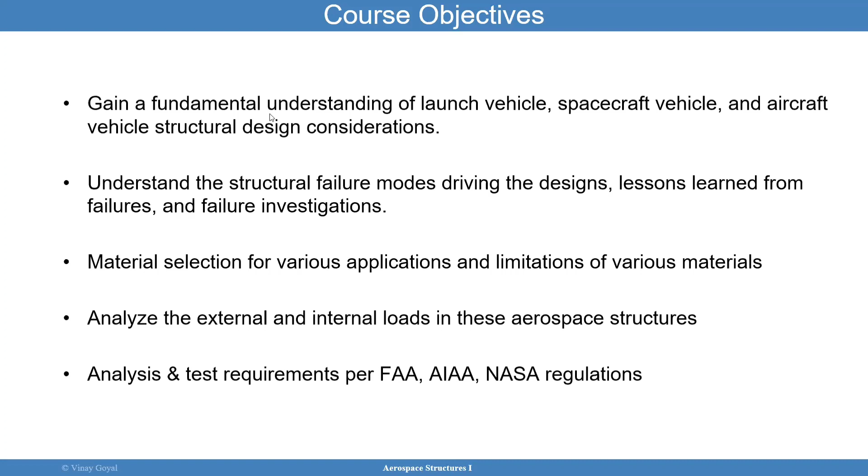The next thing that we're going to talk about is the course materials. The text and references for this course will all be provided to you. I'll provide you all the course materials in PowerPoint in the form of briefing packages, paper publications, NASA and FAA publications. The primary textbook of this course is the one I wrote with my brother. It's called Analysis of Aerospace Structures, and it's the first edition.

This edition will cover primarily aircraft design, but it can also be extended to other applications. The course will cover topics that are not included in this book, such as launch vehicles, spacecraft vehicles, and potential lessons learned from failure. We will cover some FAA requirements in this book, but not all of them. For example, AIAA and NASA requirements may not be covered in this book.

What we're going to discuss now is the additional recommended books. Spacecraft Structures and Mechanisms is a book I recommend if you're going to work in the spacecraft world. I'll be covering topics from that book as well. I also recommend getting hold of other books if you're going to work on aircraft designs. It's called Aircraft Structures for Engineering Students. That's another book I recommend if you can get it from the library or get a used copy. But I will primarily be using my book, so this is not a requirement. If you want to see how others approach a subject, then it's worth it.

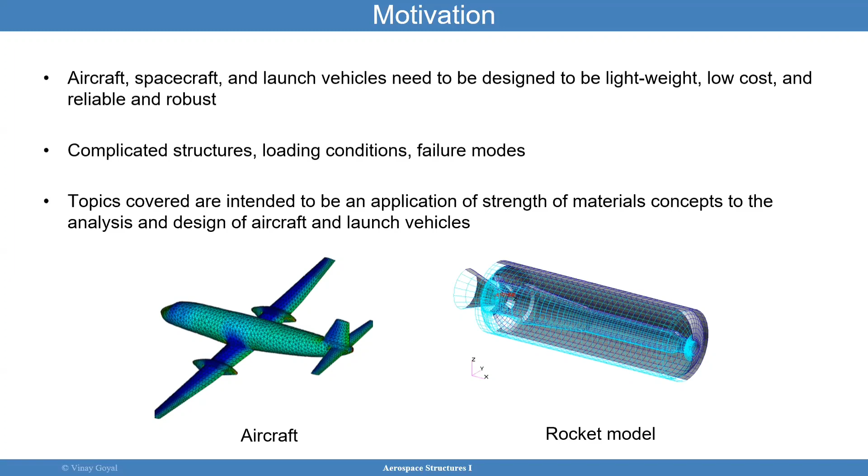Boeing 787: in this example, there was wing damage that grounded the Boeing new composite 787 Dreamliner. It occurred when the stresses on the wings were well below the loads the wings could take. Damage occurred on either side of the wing body joint, here in this region.

In this area, the structural flaw in the Boeing design was found during the ground test that bent the wing upwards. One of the testing procedures is to apply loading to these wings, bending them upwards, sometimes several feet up. The purpose of that test is to verify the design integrity of that wing.

The stresses at the end of the long rods that stiffen the upper wing skin panels caused the composites to delaminate. Damage occurred at the end of each of the 17 long stiffening rods, which we typically call stringers, and on each wing's upper skin there was some amount of damage.

The testing was supposed to go to ultimate load levels. I'll discuss ultimate load levels later, but the bottom line is that failure occurred very close to the maximum loads expected in service. For that reason, the design had to be revisited.

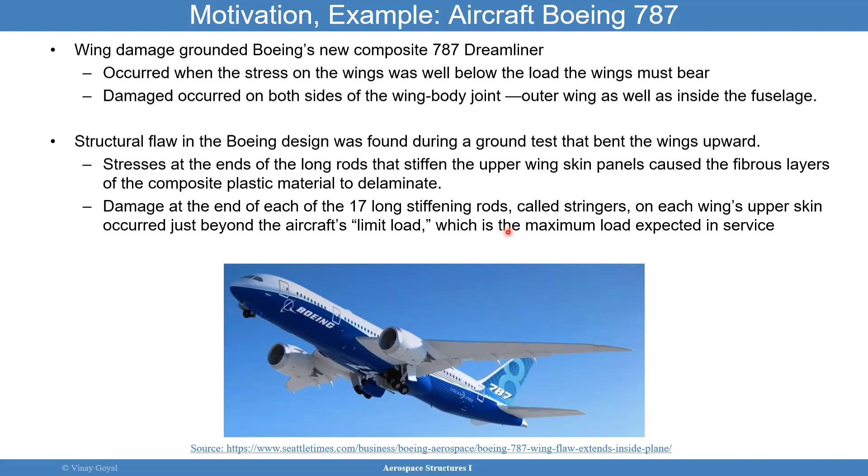Another example of the motivation behind why we're studying this - it's not that I'm going to solve these problems in this course, but to show you that structural failures do occur, and that therefore motivates the need for learning some of this material.

In 2015, the Falcon 9 V1.1 design carrying the Dragon CRS-7 mission failed towards the end of stage 1 burn. A strut holding an internal helium pressurization tank broke during second stage initialization at T plus 139 seconds at 45 kilometers altitude. The resulting overpressure caused the second stage to blow apart.

This scenario is described in the source here at the bottom. You can go to that link and study this more.

But there's also a second anomaly that occurred. It was a giant fireball on the launch pad when the vehicle was on the pad preparing for some testing. The helium being loaded into the rocket caused a failure.

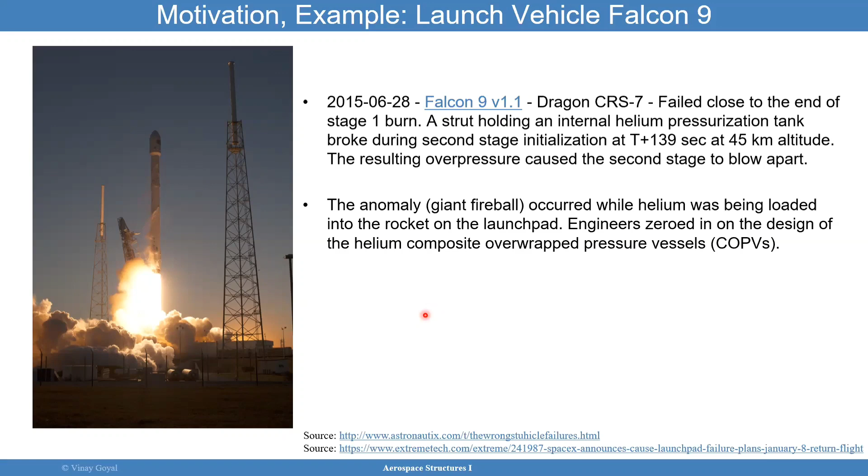Moving forward, we have the spacecraft, the James Webb Telescope, which is an amazing piece of science. This is going to be unprecedented, able to see farther than we could with the Hubble telescope. You can see here the backbone of the structure is highly complex, and it almost needs to be motionless so that the mirrors attached to this backbone can see far into deep space. This structure is designed to provide unprecedented thermal stability performance, meaning when subjecting the James Webb telescope to temperatures potentially colder than minus 400 degrees F in space, we need to make sure the backbone of the structure stays steady to within 32 nanometers, smaller than a human hair.

This backplane is actually part of what we call the telescope structure, and it includes the secondary mirror support structure and the deployable tower structure. All of this has to work well together, and it's no surprise the James Webb Telescope has experienced delays, because this is a very ambitious and very complex program.

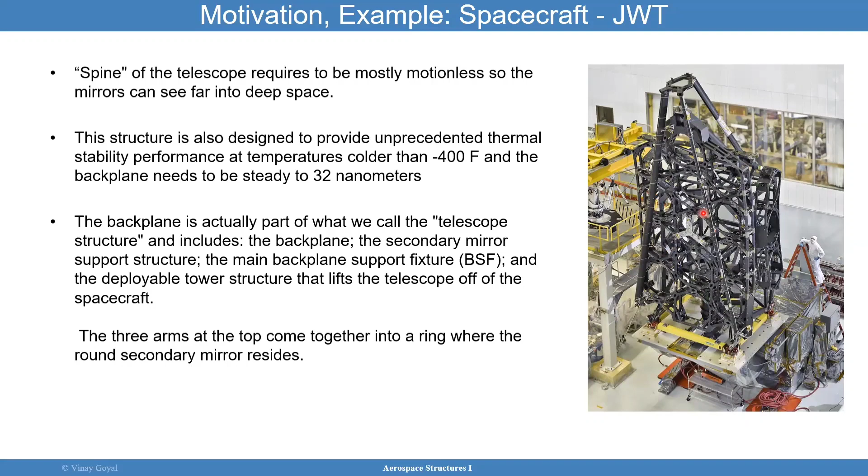The course outline is as follows. We're going to go through the overall design process for aircraft, spacecraft, and launch vehicles, the stress-strain constitutive law, and finite elements, covering fundamental aspects important to this class. Then structural failure modes, and an overview of aircraft, spacecraft, and launch vehicle components and their design drivers, connecting these together.

We'll then move on to material selection and testing for aerospace structures, and then cover aerospace structures, load, sizing, and design, covering aircraft, spacecraft, and so forth.

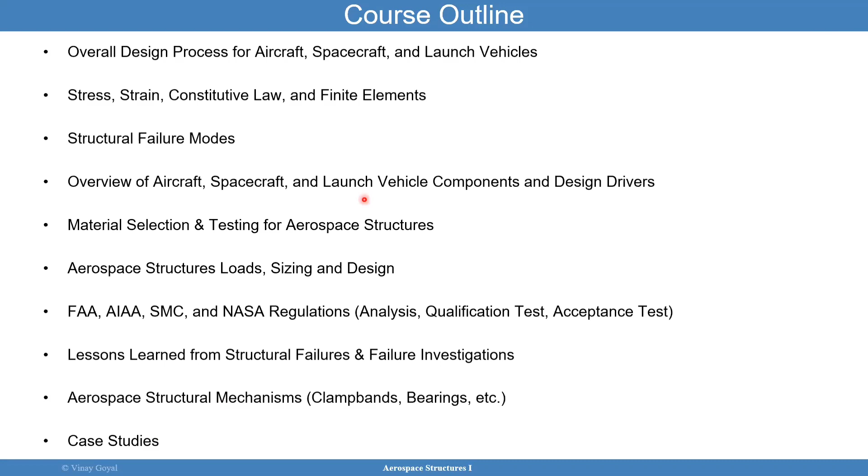Then we'll move to FAA, AIAA, and NASA regulations that contain analysis, qualification, and acceptance test requirements. From there, we'll move to lessons learned from structural failures and failure investigations, then aerospace structural mechanisms such as clamp bands, bearings, and things like that, and some case studies from industry.

So today we'll be covering aerospace structures one, aerospace systems engineering, and I pulled from a variety of resources here, as you can see.

Why we need to cover that is because when you design an aerospace system, it is complicated and it draws from a lot of different disciplines. You have aerodynamics, propulsion, thermal, dynamics, structures, manufacturing, quality and control. All these systems become quite important in the design of the aircraft, launch vehicle, or spacecraft, and all these disciplines have to work very coherently together to accomplish the mission design.

While this course is about how to deal with aerospace structural design, the reason I'm bringing this up is because it becomes very important that the structures team can interact well with the other disciplines in order to accomplish the planned mission.

Many subdisciplines exist within each of these disciplines. As an example, in the structural design discipline you may have non-destructive evaluation, which is methodology to inspect hardware for flaws. You may also have to involve material scientists, CAD designers, the test team doing the testing, and the technicians that go along with them.

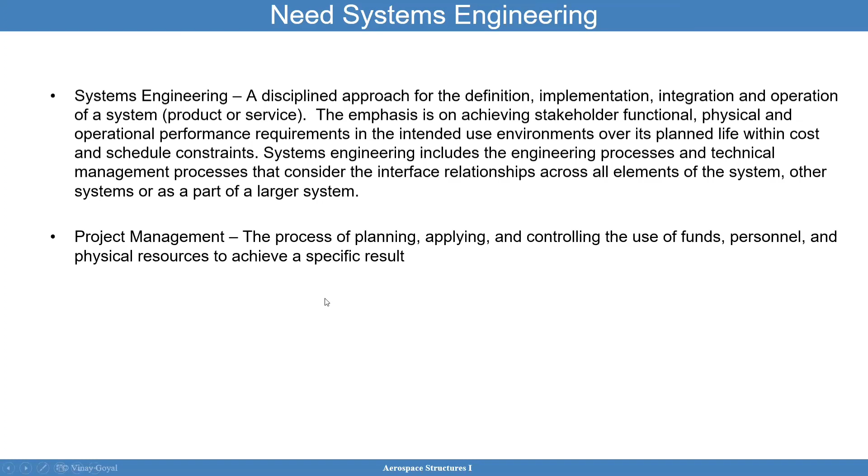I have to have some planning, controlled use of funds, and make sure the efficiency embedded into the planning of the project is optimal. I have to make sure that the teams are talking to each other. Otherwise, the project will be a failure.

Systems engineering needs to make sure that the interfaces between the disciplines are working well and communicating. For example, if the structural team is designing an aircraft or launch vehicle component to 150 degrees Fahrenheit, but the thermal team worked with the fluid mechanics team and determined that the temperatures the system is going to see are closer to 300 degrees Fahrenheit...

If these teams are not communicating, the structures team will complete their design and the thermal team will not have communicated that there is an issue that should be looked at again. All these disciplines have to constantly talk to each other to ensure that requirements from one discipline to another are properly flowed down, so that their interfaces are smooth and we can make progress in the designs.

Systems engineering is a robust approach to the design and creation of our operational systems. The approach relies on several key elements: identification and quantification of system goals, developing alternative system design concepts, performance of design trades, and selection and implementation of the best design.

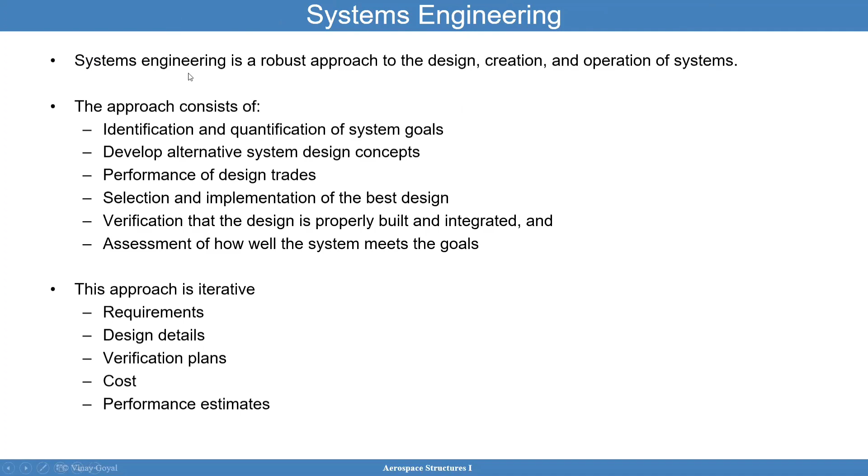For example, if I had the team that works on the engines, and the team that works on the rudder system, and another team that works on the nose, I may have a multidisciplinary approach for each of those subsystems, but I need to make sure those subsystems can come together well. So not only do I need each subsystem working well as a team, I also need to make sure that the interfaces where subsystems come together don't have issues.

The problem really emerges typically when subsystems are designed independently and are not well integrated. Why that happens is because managers will focus on their areas of expertise, or their subsystem arena, and forget how their subsystem has to work well with others.

They may develop systems that are not even usable by other subsystems. So without a clear understanding of what must be done for each subsystem, the development team runs the risk of inconsistent designs, conflicting interfaces, and even duplication of efforts. This can also cost money, cause schedule delays, and cause performance problems.

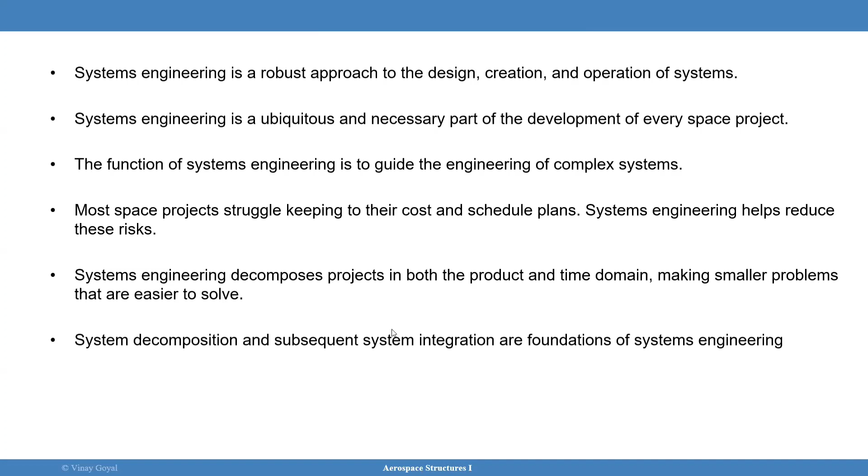So systems engineering may not always prevent overruns. See JWST, the James Webb Space Telescope. It's a large, complex project with many systems integrated. So systems engineering may not always prevent overruns, but bad systems engineering can be equally bad as not having one.

So it's important to understand that the whole point of systems engineering is to stay on schedule, be efficient, and bring teams together working very closely in a well-oiled machine. If you don't have that, then you may not even be profitable down the road.

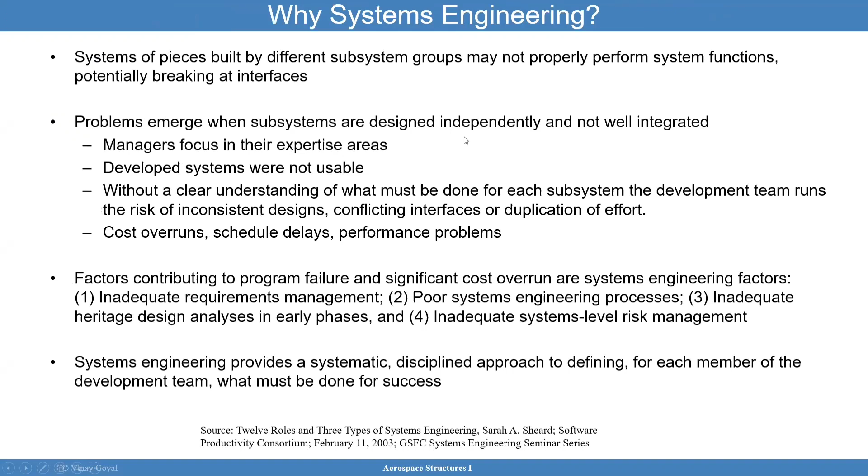That's a great point and great question. What it takes to be a good systems engineer is to actually take training in that area, number one — you want to take courses in that area. But number two, a good systems engineer is one that has experience doing it, having gone through various areas of expertise. The best systems engineers I've seen are ones that have actually worked all the systems.

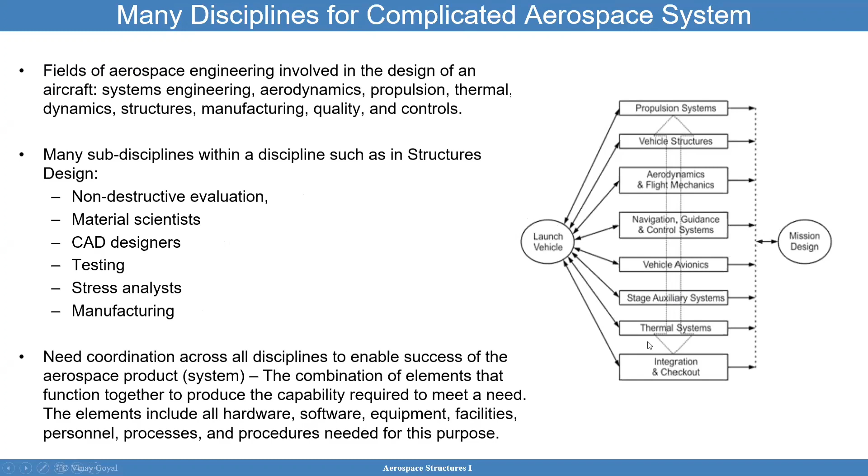And then when they go back to systems engineering, they have all the knowledge from different disciplines, so they know the roadblocks to overcome. In other words, a good systems engineer has experience in multiple facets of the program and each discipline, so when they're in that position, they know what roadblocks will be encountered. It makes sense — you need to be a generalist, you need to know how to do a little bit of everything.

Even schooling may not give you everything you need for that. You may want to get some experience working at a particular company and tell management, hey, I want to work on systems engineering — help me rotate around. If you're not good at systems engineering when you're hired, you want to get training, but you also want to get good at everything.

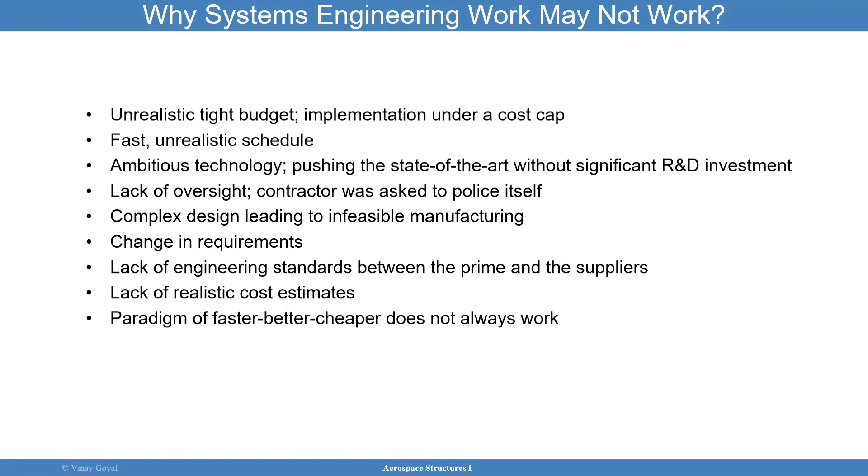You also want to get experience in all the different areas you can, so that when you're working in systems engineering, you can be a generalist and identify those roadblocks when they show up, and you can help teams work well together. And that's hard to do when you don't understand what each team is really doing.

The key ingredients for successful systems engineering are documentation, bringing the requirements down to the lowest level — flowing down those requirements, functional requirements, and regulatory requirements all the way down. All the materials that are going to be used, making sure everybody understands what the materials are being talked about. The CAD drawings, having very good configuration management of these CAD drawings, safety documents, interface controls — the interface controls between components. You also want to identify design drivers: cost, schedule, and performance.

To get high performance, reliability, and confidence, it is important to really consider the knowns and the uncertainties: developing requirements, identifying options, doing analysis and trade studies, and defining product details. You also need to understand the acquisition strategies.

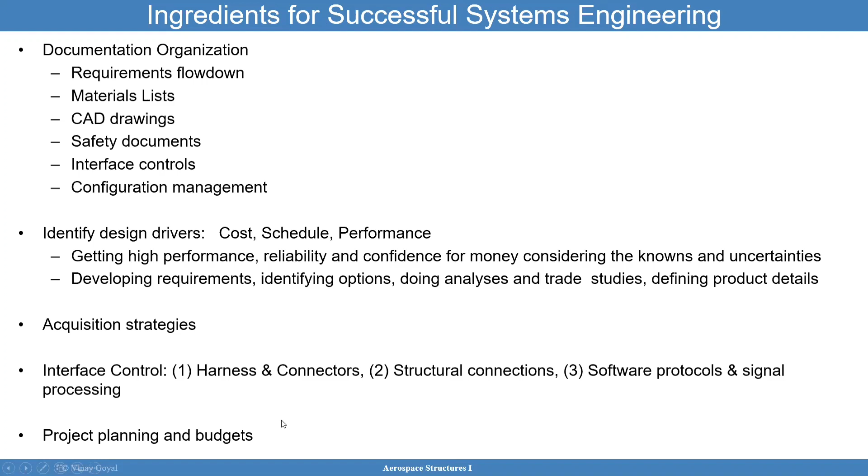For the interface controls here that we're talking about, what are the structural connections, the harness and connectors, software protocols, and signal processing. And then you also have to gain a fundamental understanding of project planning and budgets.

Systems engineering disciplines applied through the project life cycle as a comprehensive, iterative technical and management process to ensure that you have a proper flow down of requirements, and can translate an operational need into a solution through a systematic concurrent approach to integrated design.

So you want to make sure that the team is working well together. That's really what concurrent is saying here, is you're working towards an end goal together. You want to integrate the technical input of the entire discipline team, the entire community, and all technical disciplines together.

There needs to be a lot of communication between disciplines, ensuring that all interfaces are compatible. You want to ensure that we consider the integration, verification, and validation of the processes through the life cycle, starting from the concept design. We also want to identify, characterize, and mitigate risks, and provide information for management decisions.

So here I have three legs at top level. The first one is systems design processes. The second one is technical management processes. And the third one is product realization processes.

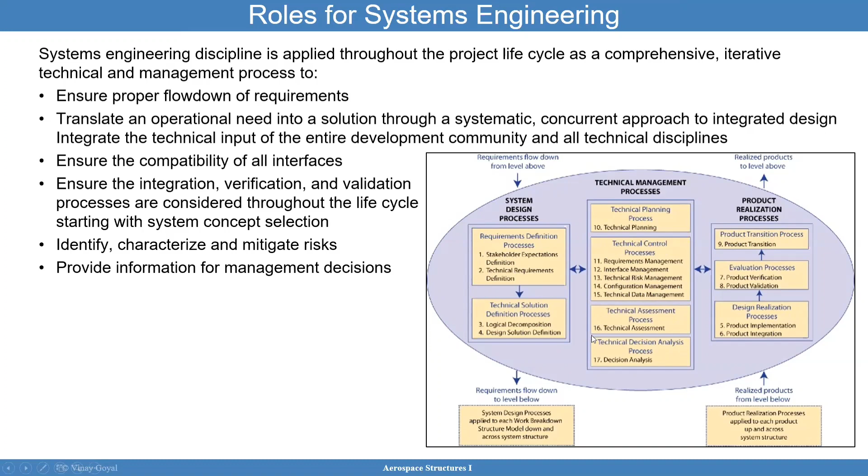So regulation, safety, environments, cost, schedule, and objective. We need to really understand what is the objective. Am I developing an aircraft for commercial applications, military, cargo?

Who are the key players? Who are the stakeholders for the particular objective I have in mind? Is this aircraft going to just go from here to San Diego? Or is it going to go from here to Africa or another country?

If it's a fighter jet, it needs to be extremely responsive. But if it's a fighter jet for military applications, the regulations for that may be different than if it's a commercial application. You also need to understand the regulations in the first place and need to understand what agencies are involved.

For example, the Federal Aviation Administration is the airworthiness authority here in the United States of America. The European one is the European Aviation Safety Agency. So there are various organizations. Or if I have a launch vehicle design for NASA, it needs to meet some NASA requirements and so forth.

Cost and schedule, again, we touched on that, but the point I want to make here that comes up a lot, and I will be covering more in this course, is skimping on important materials testing and not paying attention to that. Because if you do not put attention into materials testing, it can come to bite you later in the program, where that testing could have exposed issues early in the program rather than when it's too late.

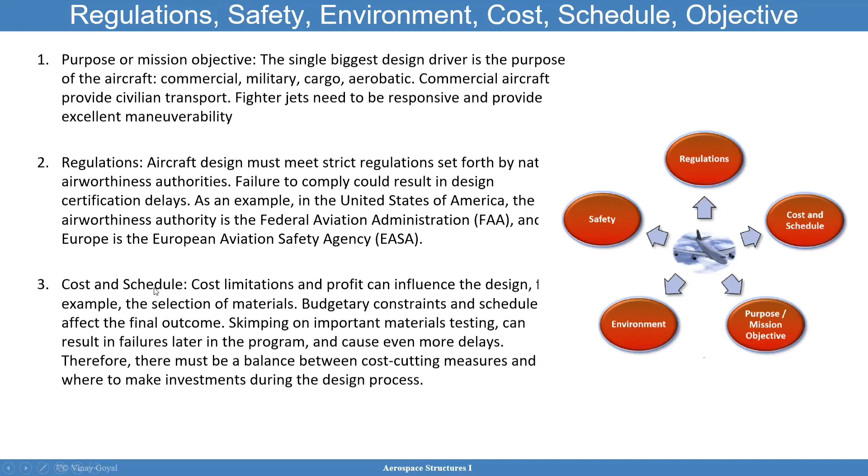We also have the environments, the launch environments, the aircraft environments. We also have to make sure that the design goals are clear: lighter, cost, fuel efficient, quieter, while also producing fewer carbon emissions. So the selection of materials and the unique designs will allow you to address this concern.

Safety is another one, and it affects elements such as manufacturing flaws, errors, human errors, natural hazards, impact events. These are things that need to be considered in the aircraft design.

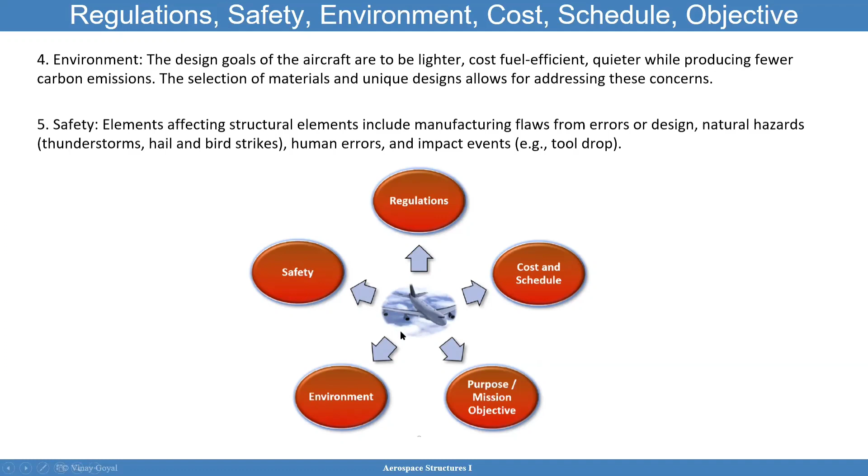So milestones become of quite a bit of importance. They play quite a bit of importance in systems engineering. It basically allows you to check the system health as a function of time, from early opportunity to release, early concept design, and all the way down to the launch events or aircraft deployments to the different airliners.

So these intermediate steps become a key role in determining how the project is going. You have several cycles that could be iterative at times. You have the initial research, the concept studies, the concept and technology development, and some of these could have a lower maturity readiness level in terms of technology.

And then you can now start entering, once you have the concept design in place and you've gone through some mission concept reviews. I'll be covering some of these MCRs, SRR, SDR, PDR, CDR, PCR in the next slide. But once you have the mission concept review, and you've matured the technology and the project cycle is maturing.

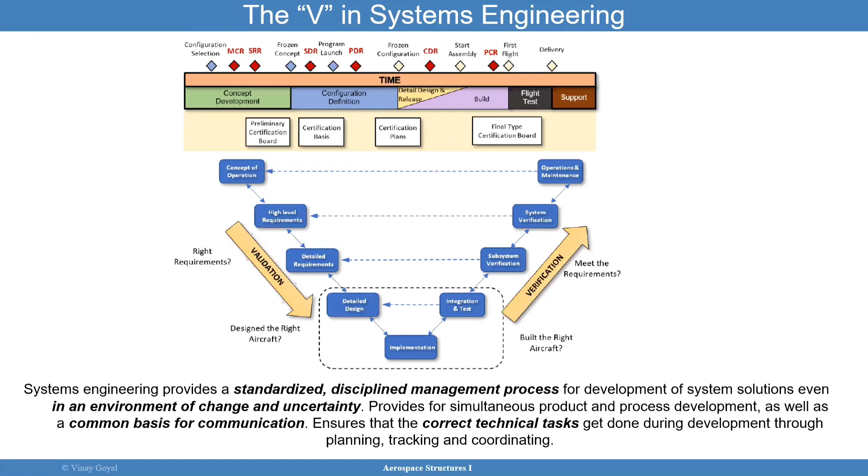And the cost to change direction later on becomes more and more difficult. So if I'm further down in the design process and I find that I have to change something, that's going to cost a lot of money. I have to go back and redo a lot of stuff. That's why it's important to do as many material tests as you can and subcomponent level testing as you can at the beginning to inform the design and development, so that in this phase any change in direction is minimal in terms of cost and schedule.

The Boeing process can be summarized in three different flow charts. You have a continuous feedback of information going back and forth between design requirements and regulatory requirements. These are different things, and they feed into the design, which must be validated and certified so it can enter service. Throughout this process, there's continuous feedback of information.

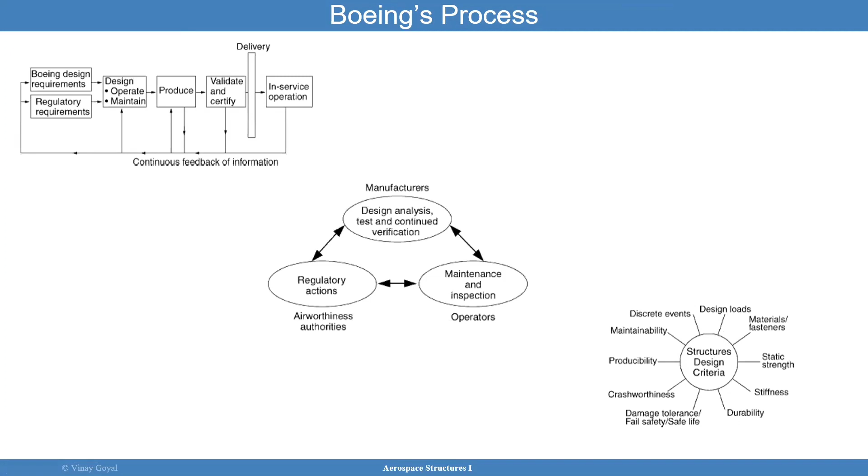Looking at a bigger flow chart now that includes disciplines, it has the same elements we talked about, but it's good to see them in this context. You have requirements and specifications, performance and weight cost trade-off studies, and in conceptual design you look at candidate configurations and select the right configuration layouts.

Here you're looking at multidisciplinary analyses: aerodynamics, propulsion, the mass properties team, loads, structural sizing, aeromechanics, manufacturability, and avionics. All of that has to come together, and this is typically true for launch vehicles, aircraft, and spacecraft.

Once you go there, you move into preliminary design, where again all disciplines are involved, and wind tunnel models become important to demonstrate that the loads you presumed are even accurate.

Then you enter a phase where you finalize those designs and move into production, because you have to test the designs to make sure they work. That requires engineering laboratories and may include integrated disciplines working together to determine whether the production design is adequate.

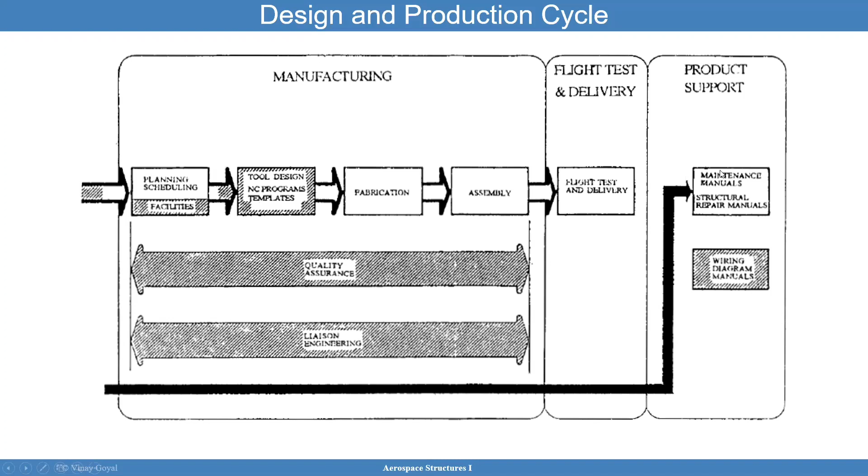Once you've gone through flight testing and the product has been certified, it's time to deliver the aircraft, while ensuring that throughout the process you're developing manuals for maintenance and structural repair.

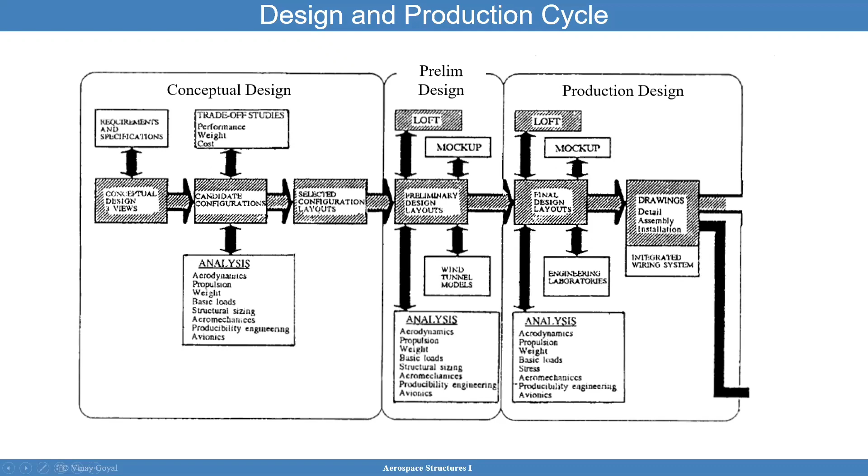This process requires some preliminary sizing. A common question is whether you can start using finite element models early, in the conceptual design phase. The fact is that most airframe structures are highly redundant, while space vehicles like launch vehicles and spacecraft have little redundancy. Regardless, in the concept and preliminary design phases, you typically rely on hand calculations that verify simple finite element modeling.

For simple members, you can do a simple analysis with hand calculations using a calculator or something like Excel, approximating some of the designs with simple stress methods from mechanics of materials rather than detailed analysis. Detailed finite element modeling is costly and may not get you into the ballpark as quickly as a preliminary analysis. Preliminary structural sizing input data is required for several analysis cycles, which could include finite elements, but before touching finite elements, you want to ensure preliminary sizing has been done by hand calculations.

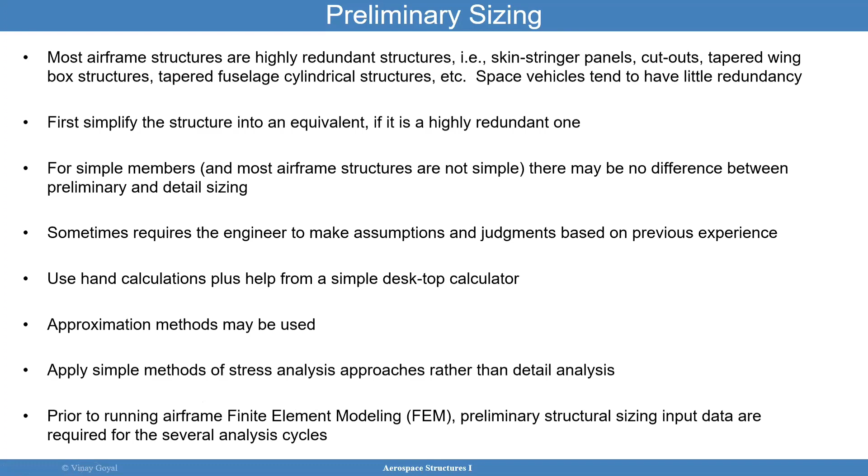Because once you go to the detailed sizing, that takes a lot of time, especially when finite elements are used. Sometimes detailed sizing is very difficult to do by hand calculation. Hand calculation puts you in the ballpark, but then the detailed work puts you closer to the goals that you need to achieve, because finite elements are already required.

You're looking at structural designs that have very low factors of safety, that have to be weight sensitive, basically low weight, and cost effective. And so you want to make sure that you've done as much sizing as possible by hand calculation before you step into more complicated modeling.

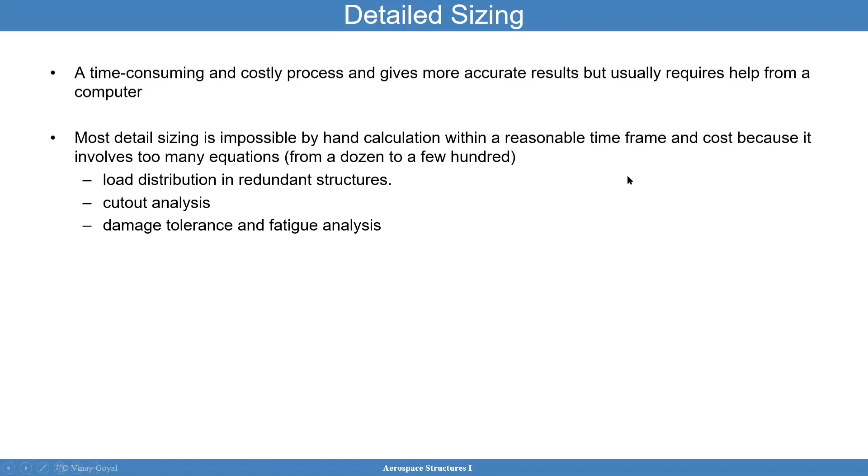And bottom line, is the design adequate? To answer that question, there's cycles that you have to go through. Initial design concept, you have to ask the question, do I have positive margins? I do a stress analysis, figure that out, and I iterate with the design and then go into more detailed design until I'm happy with the final design.

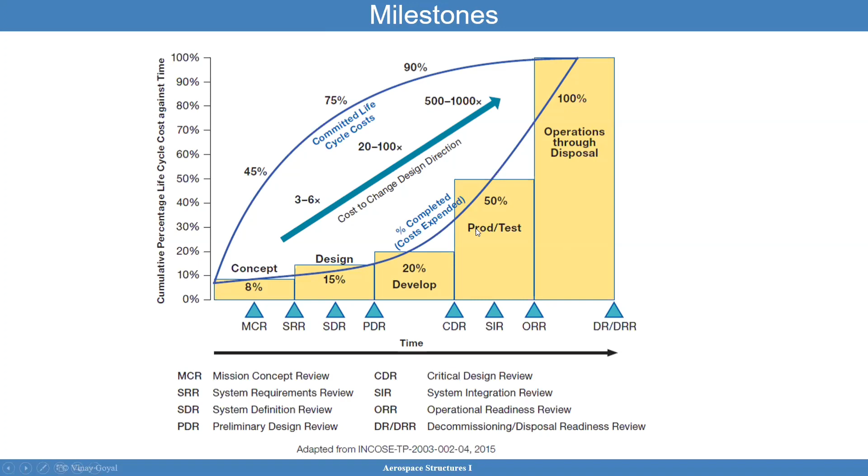Now, that doesn't mean that the structure is going to be safe. I have to test the structure first and validate my models, because if there's a problem there, then I may have to go back to the drawing board, and that will cost quite a bit of money. The more time passes by and the more mature the system becomes, if I have to change direction, we're looking at a significant amount of cost and schedule delays.

Systems engineering, launch vehicle and space vehicles is extremely important and is required. Contractors on either side are different, so the contractor for launch vehicle may be different from the contractor for a space vehicle. And also, these vehicles have to be coupled together in the dynamic models. We'll be talking about that.

And so systems engineering here is highly required. The interfaces from the launch vehicle side need to be properly defined compared to the space vehicle side. The vibration environments that the launch vehicle produces, you don't want to break the space vehicle with those vibrations during ascent. So all of that shows and highlights the importance of systems engineering.

What if I need a 90,000 pound payload? Is the launch vehicle I'm selecting even able to take that?

I'm going to show an example of a user's manual that provides essential data on the Ariane 5 launch system, which together with their other launch systems constitutes their transportation systems. Their user's manual typically contains compatibility of a spacecraft and spacecraft mission with launch system. It constitutes the general launch service provisions and specifications, and provides data to initiate and prepare all technical and operational requirements for any launch of any spacecraft on the launch vehicle.

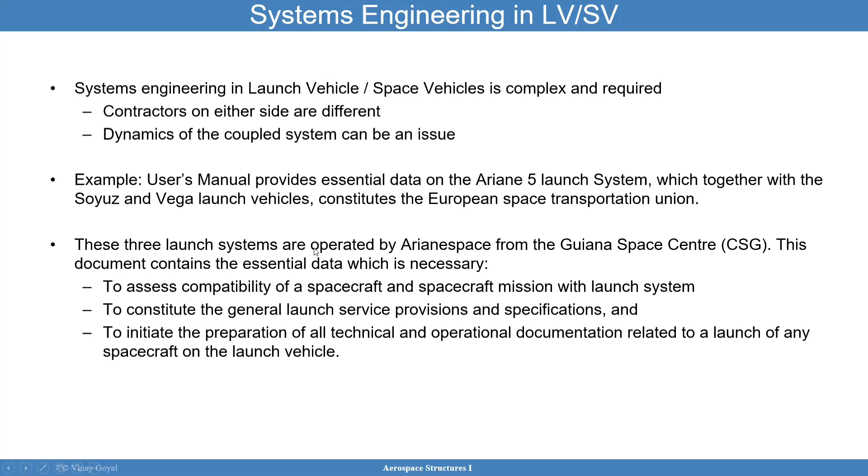What if you have a bigger payload? Maybe you have to come up with a different fairing. What kind of acoustic protection you have for your spacecraft. It's going to give you information about the adapters. And the launch vehicle adapters, they're going to connect to your spacecraft.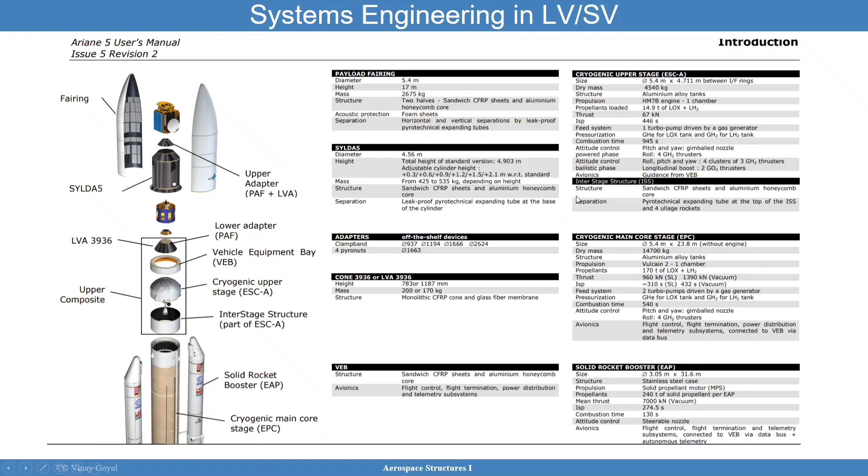Here is a quick view of the kinds of information you will find in their user's manual. It's going to provide information on the performance and launch mission, what kind of orbits you can achieve, insertion accuracies, mission duration, launch windows. It's going to give you information about spacecraft orientation during ascent phase. Horizontal, vertical, how is it oriented?

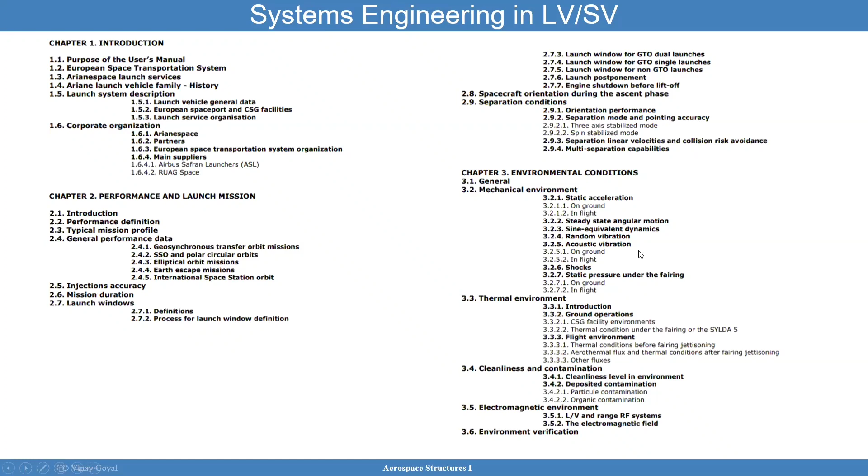Separation conditions. It's going to have information on the environments, static acceleration, steady state angular motion. It's going to give you all the information you need to be able to ensure your spacecraft can sustain those environments. Thermal environments. How clean is the system for the spacecraft, and the electromagnetic environments, and the RF system, and the ranges, and does it overlap with the spacecraft?

You also have the spacecraft design and the requirements for those, and what is compatible. Spacecraft interfaces, where are those interfaces defined, and how they're encapsulating the spacecraft interfaces, and so forth. So you're going to see a lot of information there on that.

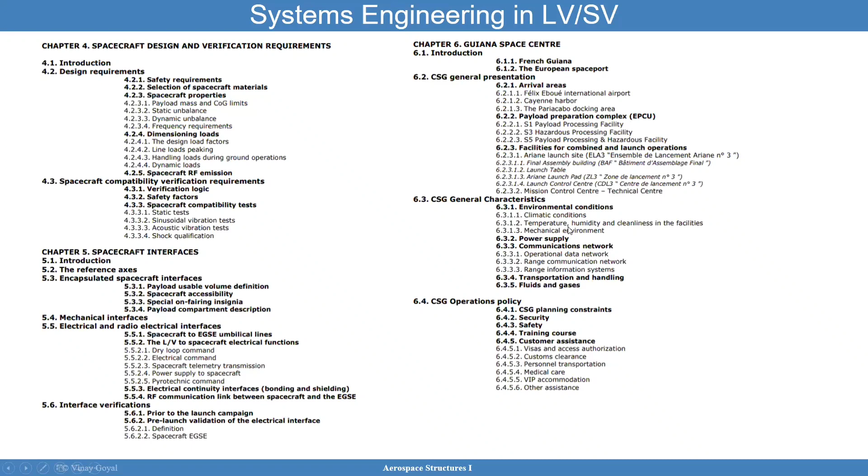And then you have the operational space center location, and the range information and mission control information, and so forth. You also have mission integration and management, the launch campaign itself, countdown information, spacecraft operation plans, quality assurance, and then you also have a bunch of appendices normally that provide even additional information there. So I hope that makes sense to you guys as we go through.

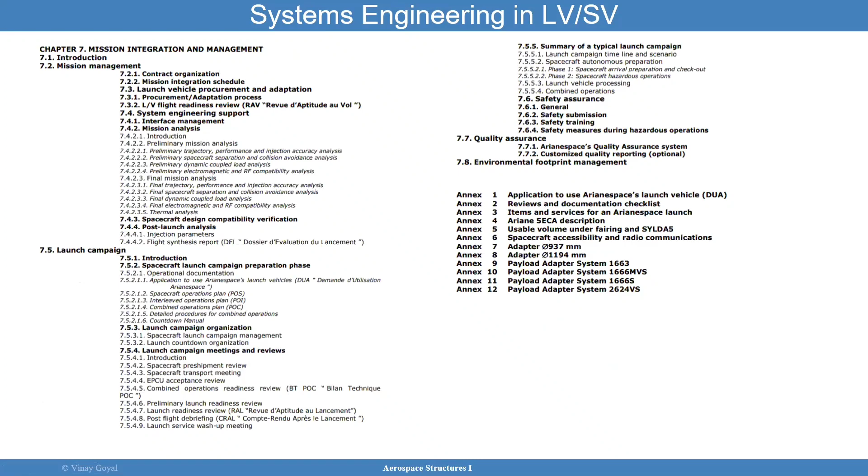So what are the keys to success in any program? To succeed, it's important that we have effective communication across the organizations, the design authority, the end customers. We want to have great communication across the same company as well.

It's important to use a building block approach. We'll be talking about that more, but it's important to characterize the material properties and build confidence in the analysis via testing. We also want to evaluate the baseline design through testing, manage uncertainty, and we'll go through all of that in a deeper level later.

One of the most important things is to apply lessons learned from past failures and anomalies. One of the biggest lessons learned I want you to keep in mind as we go through this course is not to forget the lesson learned. That is a lesson learned itself - not to forget the lesson learned from past failures and anomalies, and bring them to light as you're working through issues.

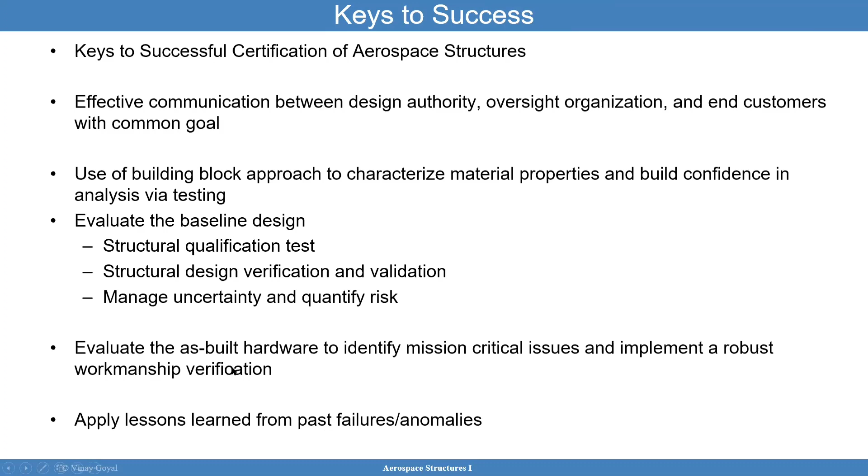So communication allows building an understanding up front, ensures the set of requirements is complete, and provides upfront understanding of structural requirements and the rationale behind them.

You also want to integrate the oversight, design authority, and customer teams early to flush out best practices relative to test, analysis, and workmanship of structures.

I think it's important to have face-to-face meetings to build healthy professional relationships and to demonstrate a mutual interest in ensuring that you're marching towards the same goals as everybody else, because you don't want to have miscommunication too late in the game.

And while requirements imposed by regulatory agencies like NASA are the gold standard, it is important for the teams to be open-minded about possible ways of solving the issues at stake. There might be ways to get there that have a lower level of risk compared to other alternate options provided, or the one path that is being used.

So it is important to form, as a systems engineer, a collaborative environment that facilitates communication, data transmittals, resolution of concerns, and promotes the identification of technical solutions.

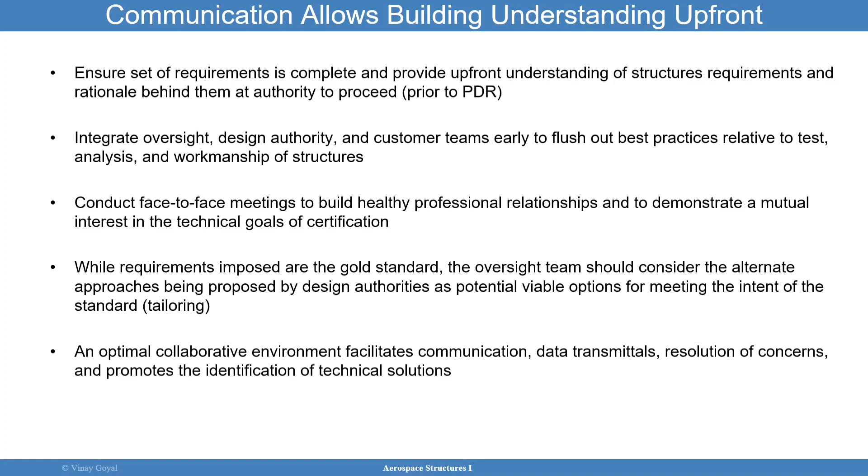So it's important that the teams work well together. It's important that teams be humble with each other, and that the systems engineer is able to smooth out any relationships and make sure the flow down of requirements - interface requirements, regulatory requirements, functional and performance requirements - are all working well together. And then all that is put together and monitored against a series of milestones across the program as we march forward.